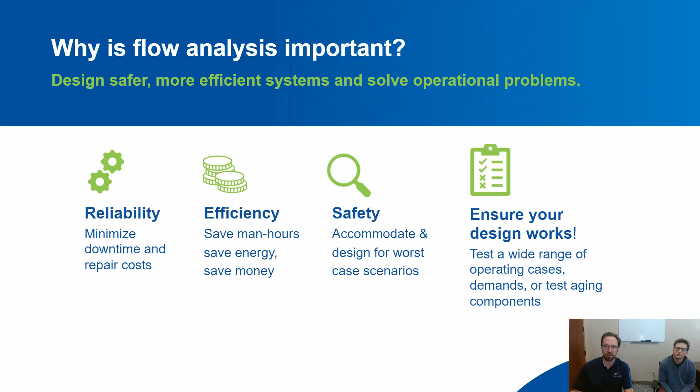And of course, just ensuring the design works. So not only making new greenfield designs, but also improving designs that you may already have. We serve a lot of different industries.

General software, but a lot of applications there. We have a global reach. This past year, I believe, was our 30th anniversary, so we've been around for some time. We have a presence in more than 100 countries around the world, in large part supported by our network of partners—32 distribution partners all around the world that know, understand, and sell our software.

We also like to work with students and universities, so we have a lot of presence there, with student outreach and things like that.

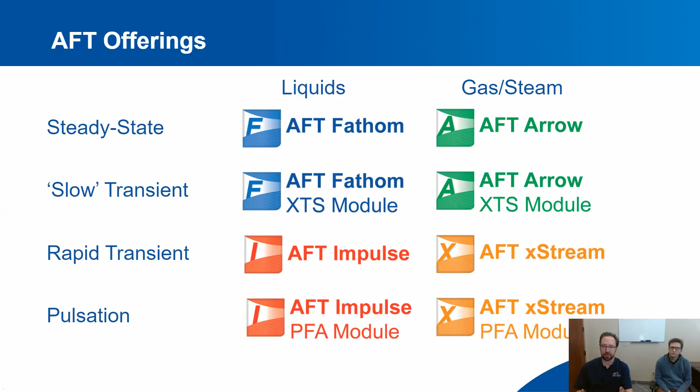Our products, we have this kind of matrix of products here: Fathom, Arrow, Impulse, and xStream. The matrix here is that we have 2 products for liquids, 2 for gases.

And on the opposite axis, 2 for steady state, 2 for transients, essentially rapid transients. So Fathom is our liquid steady state software, Arrow is similar steady state network software for gases, and then in the transient domain we have Impulse and xStream.

We also have pulsation capabilities in those rapid transient softwares. So we have this pulsation frequency analysis, or PFA module, in both products to enable specific analysis in the frequency domain.

On high speed pulsation like you would see from a reciprocating device. We also have these, what we call here, slow transient modules.

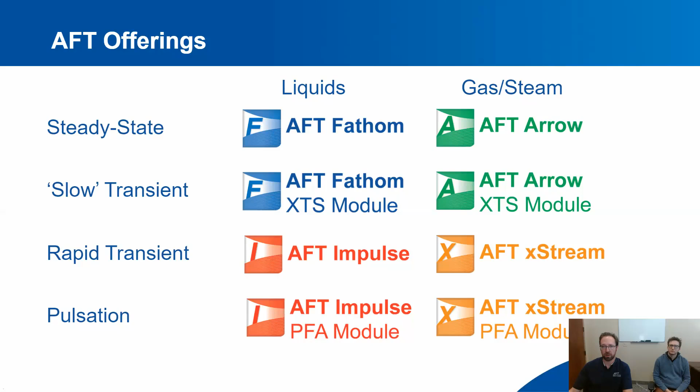That is kind of a quasi steady state, over-the-day kind of change in maybe tank levels, something like that. What we're going to be talking about today is really the fast transients here that we analyze with AFT Impulse and AFT xStream.

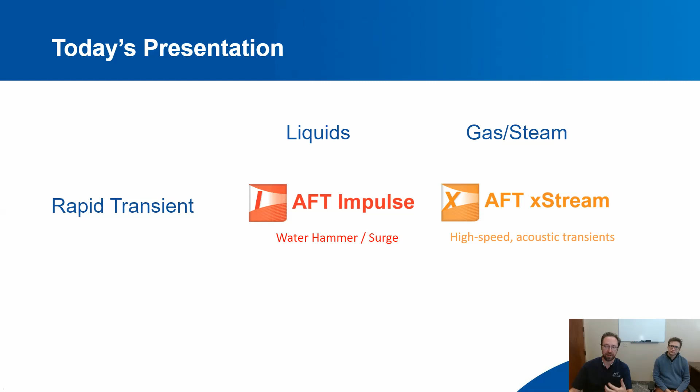So high speed acoustic transients, surge, water hammer, steam hammer, things like that. And in particular, our papers were really focused on AFT Impulse—water hammer and surge.

All right, so the topic at hand is a summary of these papers that we wrote and presented for the ASME PVP conference this past July in Seattle.

And I do want to call out that Mark and I are not the only authors here. We also worked on these with Jan Schroeder from the Netherlands and Mokveld Valves. They make specialized valves, check valves, and surge relief valves for handling surge better.

And also Dylan Whitty with Brown and Caldwell. He has done tons of modeling with our software. He's really an expert in building these kinds of systems and understanding the risks and strategies involved in sizing this kind of equipment.

And then also on the relief valve paper, another colleague of ours, Devin Roraba, helped us out, and he actually presented that paper in Seattle.

So those papers are on our website—you want to go take a look and read the whole thing. It'll also be available, I believe, at the end of the webinar here for you.

So motivation here, as Jeffrey kind of touched on, check valves and relief valves are common. You find these in a lot of different places. There's an issue in that they are often designed and specified strictly from a steady state perspective - how do I have low pressure loss, things like that.

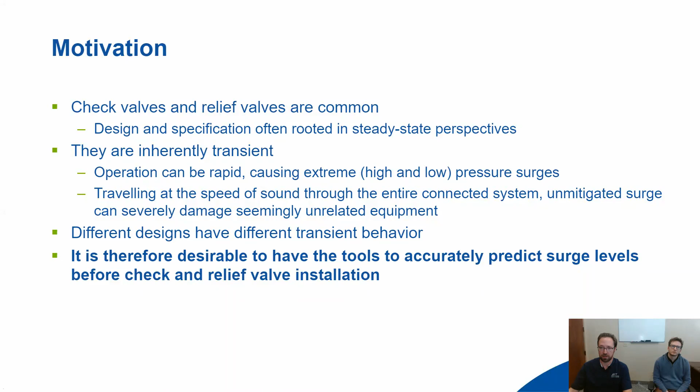You can estimate the magnitude of that surge with the Joukowsky equation. Very simple equation, it's just an estimation. A key thing is that it is not always conservative, and it's also very easy to misapply. In a situation like a valve closure like this, it's pretty easy to conceptualize what's going on, but in a system, things get very complicated very quickly.

So proper analysis requires a system level simulation. What we would recommend is the method of characteristics, a very common method used industry-wide in this kind of analysis, and the method that we use in AFT Impulse. So we're using this Joukowsky equation as an easy to understand first order estimate of what's going on here, but we wouldn't recommend its use for application.

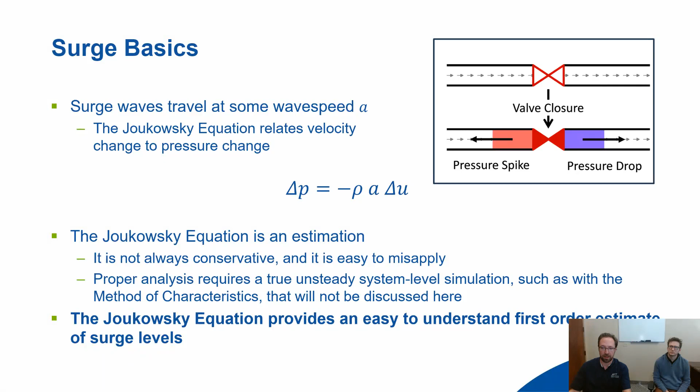Communication time is this concept that pressure waves take non-zero time to travel throughout the system. Anytime a wave is generated by a valve movement, for example, that wave is propagated throughout the system, and it will eventually run into something - a dead end, a tank, something that will cause it to reflect. And when it reflects, it will eventually travel back to the device that initiated the surge. So if that communication time is long enough, the surge levels at the initiating device, like the valve, don't have time to be relieved by the boundary, essentially.

Any closures faster than communication time will actually see the same effective surge level as this idealized or Joukowsky surge. That essentially means that if your system is long enough, if the communication time is high enough, you can't necessarily just slow down the valve closure to mitigate the surge. It might have to be slowed down to an unreasonable degree.

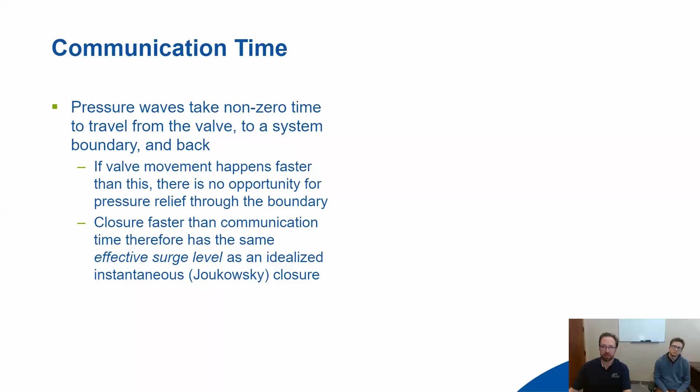As I mentioned, AFT Impulse is our software for modeling one-dimensional acoustic transients in liquid full piping networks. It uses the method of characteristics, and captures the effects of surge and communication time. We do all of this in a very fundamental way, from root equations, conservation laws, things like that. So our recommendation is, of course, to use AFT Impulse, but an even stronger recommendation is to be sure you're simulating things and not guessing or estimating. It's very easy to miss things.

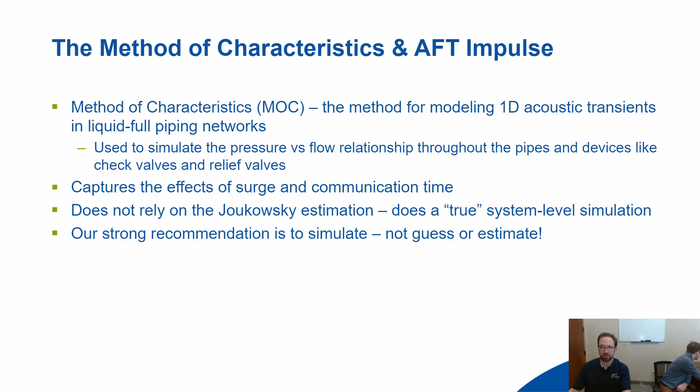So an example here, just to maybe drive the message home, is what kind of magnitudes of surge are possible. Consider something like a pump trip, flowing initially in steady state flow through a valve. When you trip that pump, this flow is going to decrease - just water, nothing fancy here. The valve closes or maybe opens against a reverse velocity of 1 meter per second.

Maybe during the pump trip, this is a check valve for example, and you have 1 meter per second flow through this valve as it closes. The slam of that valve is going to generate surge that travels throughout the system, including maybe, let's say, a half-meter expansion loop some distance away, hundreds of meters away, not really related to the pumping skid or anything like that. The question is, what kind of force might you see on that expansion loop?

From the Joukowsky method estimation, you can say that the pressure surge here is going to be about 1.2 megapascals - that's pressure level above or below the steady state pressure. A very simple way to estimate force is just taking that pressure surge and multiplying it by the cross-sectional area of that expansion loop. In this example, that would give you about 235 kilonewtons, or 53,000 pounds of force.

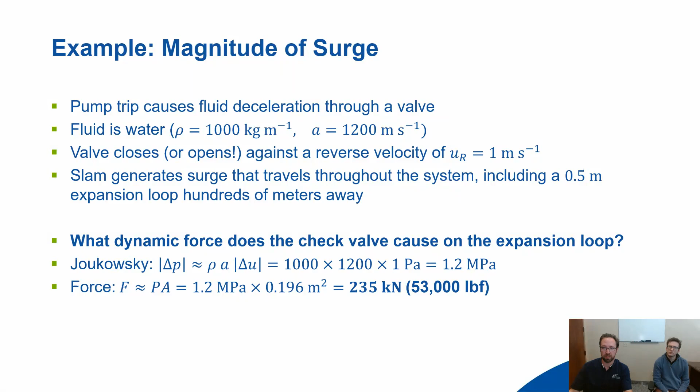Okay, so that's all just a primer on surge, and why should you care about surge. Now what we're going to focus on is these devices themselves.

So check valve obviously is just a device to prevent reverse flow. An ideal check valve is going to allow forward flow with zero pressure loss for any positive pressure differentials and zero reverse flow for any negative pressure differentials. It will also react instantly to changes in those conditions.

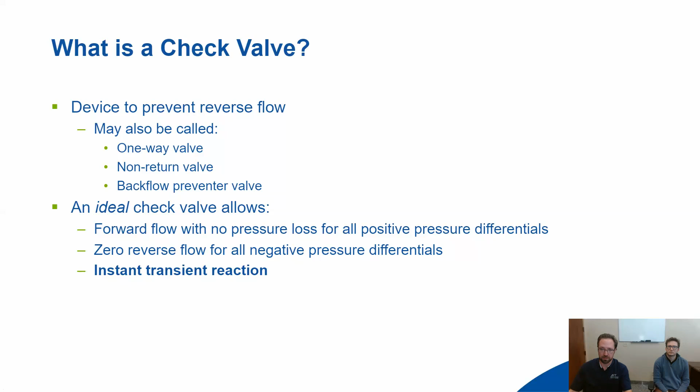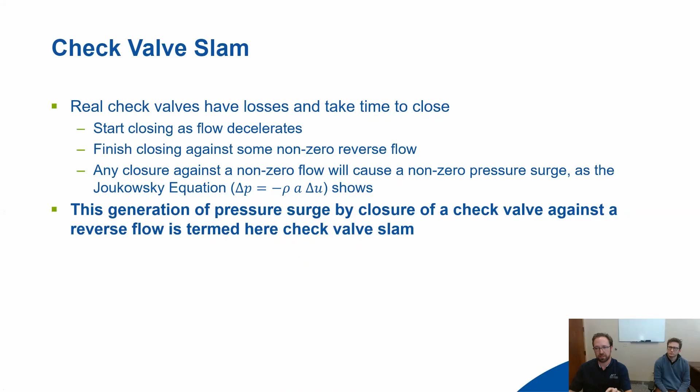Check valve slam, this is something that we're kind of defining here for the purposes of our discussion. Any real check valve takes time to close. And the fact that flow is reversing as it closes means it's going to close against some non-zero reverse flow. And that's going to generate surge, as that example showed. The generation of this surge, because of the closure of the check valve against that non-zero reverse flow, is what we're calling slam here. So there's also maybe mechanical concerns of closing a valve too quickly, but that's not specifically what we're talking about. We're talking about the pressure surge.

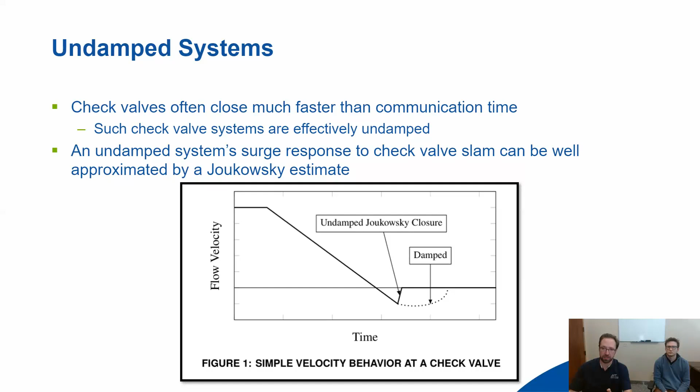If a system has a check valve that closes faster than the communication time, we can call that an undamped check valve system. And most check valve systems probably fall in this domain because check valves do close very quickly, generally. In undamped systems, surge response is going to be pretty well approximated by the Joukowsky estimate. So you can see here in the figure, if you had flow decreasing linearly until it became negative, at some point that valve is going to begin closing, but you can basically approximate this as an instantaneous closure once it hits a certain reverse velocity for an undamped system.

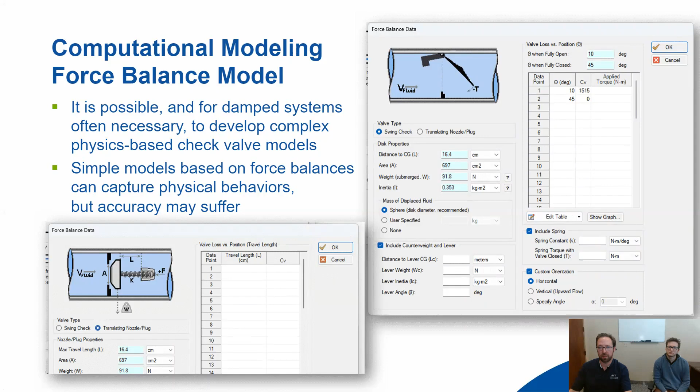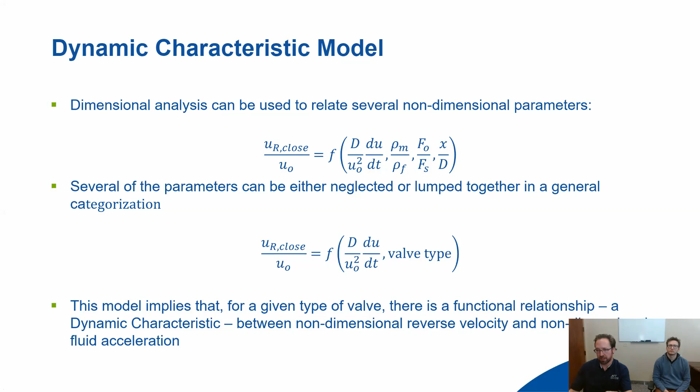There's dimensional data and non-dimensional data, like a lot of these kinds of models. You see in the literature a lot of non-dimensional kind of data and work that can be easier to handle computationally, maybe easier to write some papers on, but it can actually hide real physical behavior. So two dimensionless characteristics can actually vary substantially between two valves of apparently the same type. Two valves with identical non-dimensional characteristics may behave dramatically different, or have dramatically different peak absolute surge pressures. So that's a quick argument that we're making here.

It's expanded a lot in the paper on why you should really use dimensional data, even though you see maybe in the literature a lot of non-dimensional data. It's safer to use dimensional data.

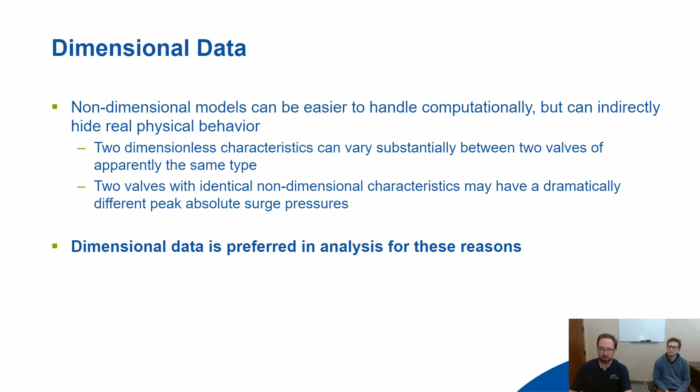It's also important to keep in mind that this dynamic characteristic model is empirical. So that curve, the relationship between those two values, is generated by test data. So take care if you're using just a curve with no data points.

This figure here is an example from the paper of one of the kind of situations you might find just in the literature. This is very typical that you just see the line here, but the real data has obviously a pretty significant scatter. So the check valve behavior is pretty chaotic, and this model should be thought of as a median behavior, not a guarantee.

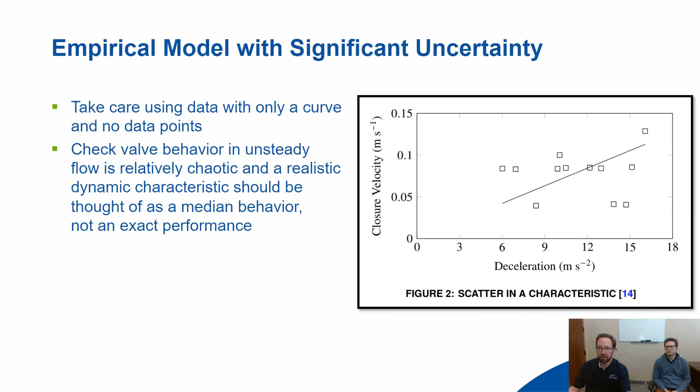There's also a lot of variability within a particular check valve type. So sometimes you'll see charts kind of like this one that are charting closure velocity versus deceleration. And it says this is the line for maybe a nozzle ring valve. And there's one line on the chart. And the reason you may see that is because that chart may be non-dimensional. But that non-dimensionality kind of hides the fact that there's actually quite a lot of spread in the data here.

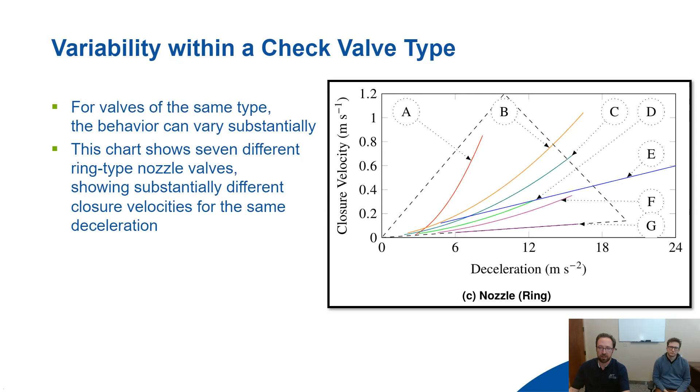So this chart is just showing that even though you have the same type of valve, depending on the actual manufacturer of that valve, the size of the valve, the specifics at play, behavior may vary quite a lot. There's a lot of historical data here. So this is that data I mentioned that has been generated via testing to create these dynamic characteristics. It's not necessarily common, but there's enough of it that we felt it was useful to create this paper and compile as much as we could of these different characteristics.

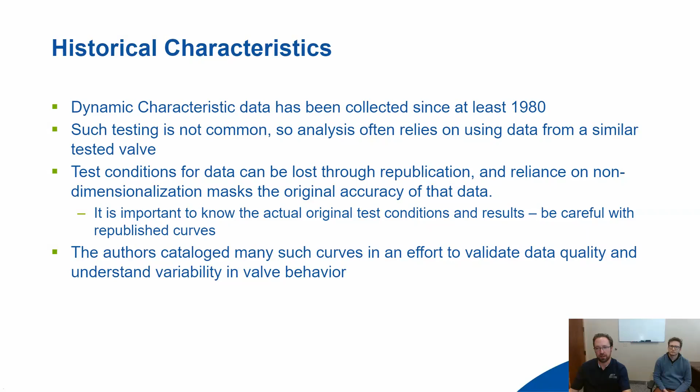But some data can be lost. So when it gets republished, you might lose those actual data points. You might have only the curve. You might lose the actual test conditions and only have non-dimensional data, things like that. So we cataloged all of this to try to quantify what is the data quality and what does the variability of the data look like. So this is a very quick summary of all of that research that we did.

So it's showing you that different types may be better, but it's also showing you that there's a lot of overlap here and a lot of range. So you have to be careful not just saying, hey, this is the characteristic for a ball check.

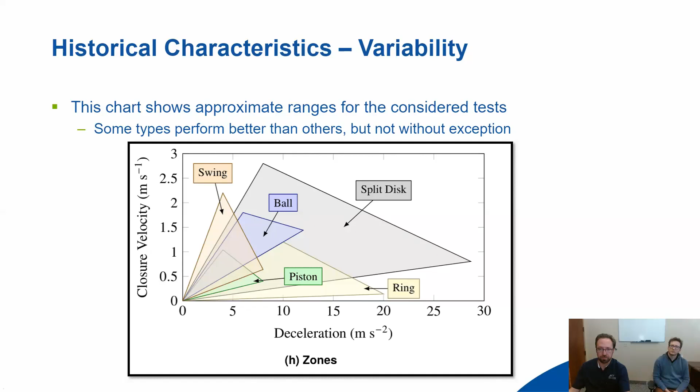Pretty quickly here, I'm going to go through how do you calculate this deceleration. Because we have this simple chart here with this nice line saying maybe I have velocity decreasing over time due to a pump trip. And that's going to correspond, since this is just a linear slope, to a constant deceleration. And it's pretty intuitive that I can just use that to look up a deceleration on the dynamic characteristic and get an associated closure velocity. And then from that, determine essentially a pressure surge level.

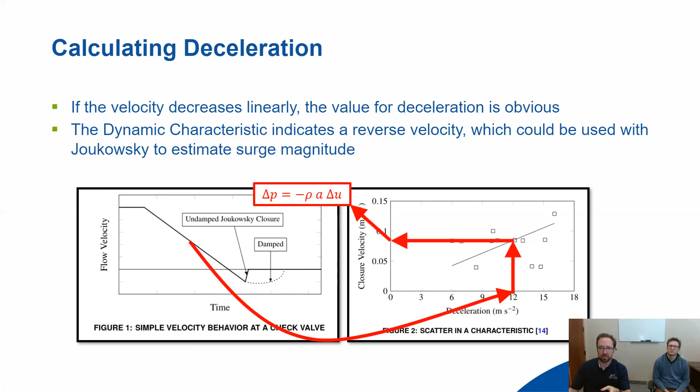So that's pretty straightforward, but realistically, you have a complicated deceleration profile. So it's less clear what value to use. And again, I'm going to go through this pretty quickly just to emphasize that there's a lot of options here. One option is to just start measuring at the beginning of the simulation and stop when flow reverses and use that slope to estimate the deceleration. But that might miss when the closure event actually begins.

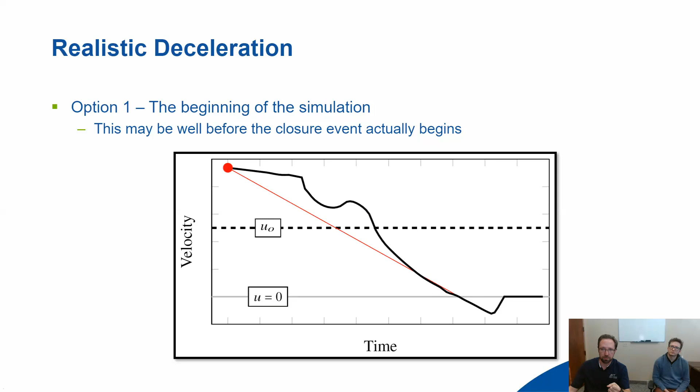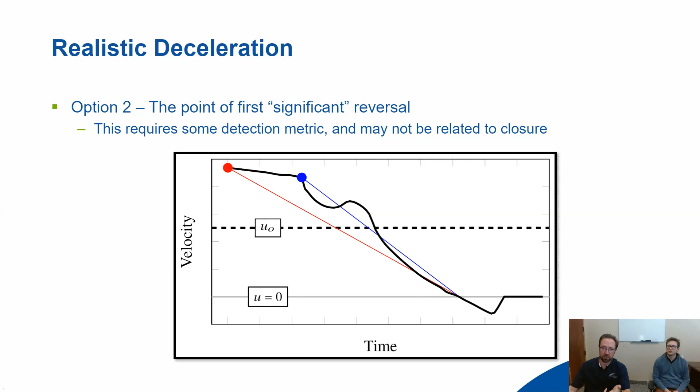So you can try to guess, well, when did the velocity start decreasing significantly? That requires some kind of metric. It may still not be related to closure. You can try using an instantaneous acceleration value, but with any kind of numerical simulation, that's risky because you can get some erroneous values just due to simulation noise.

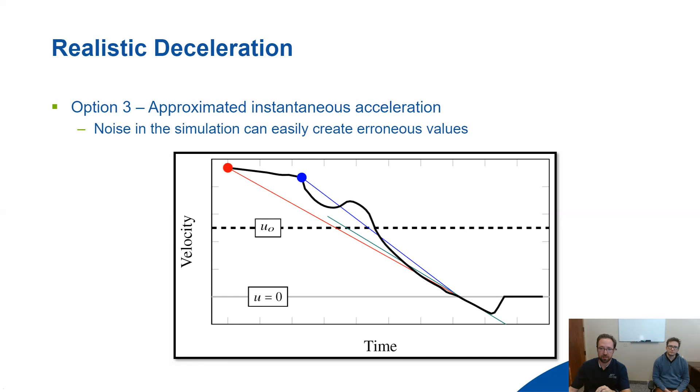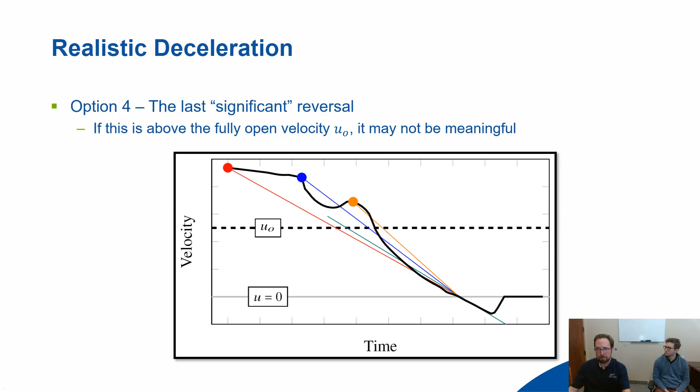You can try checking for the last significant reversal, but if that's above some fully open velocity, that's the velocity needed to keep the check valve completely open during steady flow. This may not be meaningful because any changes in velocity above that point aren't resulting in valve movement. You might just use a specified time before reversal, so a sliding window that's just checking things.

But now we also have this concept of natural closure time, which is essentially if you, in stagnant flow, just let a check valve close, how long does it take to close? There's a relationship between that and how much you can realistically expect it to be considered as being forced to close by the transients in the system as opposed to just naturally closing. So complicated relationship there, potentially.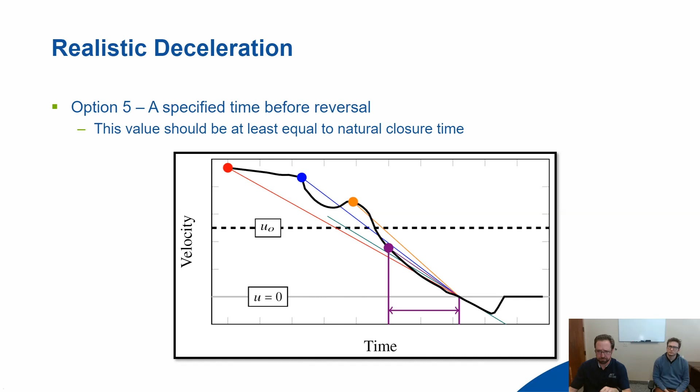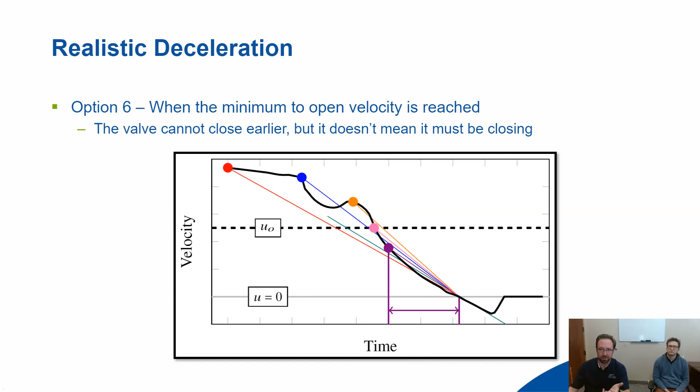You could also just say, well, let's just start tracking when this minimum velocity is reached. So it can't close before that, but maybe it is closing. But again, it's not necessarily closing. So a lot of options there. I went through that quickly. And our recommendation here is that you shouldn't use velocities above that minimum to fully open velocity.

The valve is fully open and can't be undergoing any kind of movement. And the deceleration you should use should be from when it drops below that minimum to fully open line. If the time to closure from the above point is longer than the natural closure time, you should use a specified time or check that specified time. And whichever deceleration is stronger than the above, use that instead. So it is confusing.

The summary, this is a lot easier to see in some diagrams and stuff. But the summary is basically there's a few options to calculate deceleration, and you want to use the most severe one that you can calculate with stability. So you don't want to do anything numerically suspect, but you want to say this is a conservative approach. I want to take the most severe deceleration that's reasonable to calculate and use that.

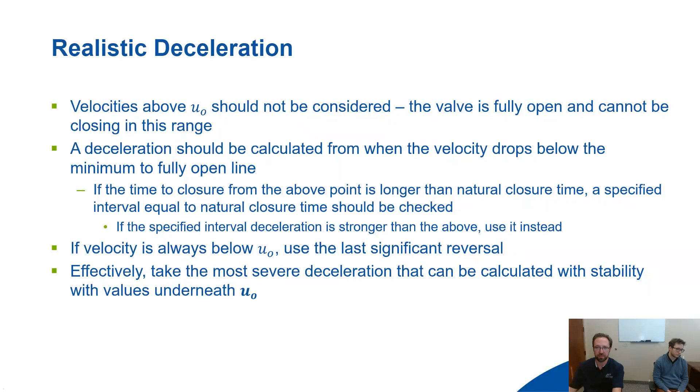All right, so the characteristic model in Impulse. This is just a screenshot from our check valve model. And you can see a number of lines in the lower right of this figure. Those are different options for dimensional check valve curves. So you can choose one of these. You can choose non-dimensional curves, all just from the literature, and run with those.

But you can also define your own characteristic. It's pretty simple to do all of this. It's really just, give us a curve, give us maybe a fully open or minimum to fully open velocity, and you can run with it. And Impulse will give you some estimation of the surge levels when that closes.

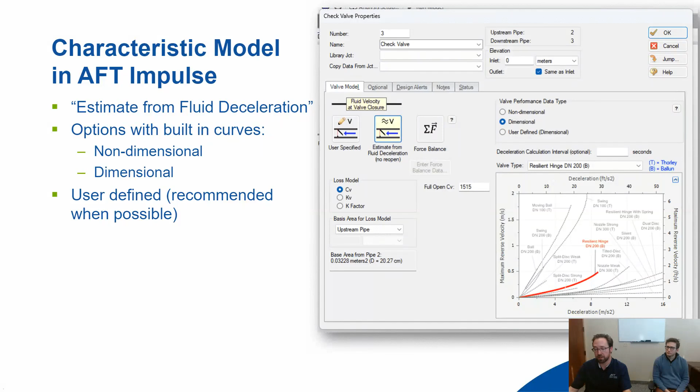So I said a lot about, hey, this is an empirical model. It's not great. You want to do things conservatively, so that brings up the question, well, how accurate is it? This is from another paper that some colleagues of ours generated, both at AFT and industry partners. Essentially a case study on a municipal water pumping station in Barcelona. And the idea here was there were two check valves in the field, and they were looking at which one of these will be better for the system. Do we need to replace the swing check with the nozzle check?

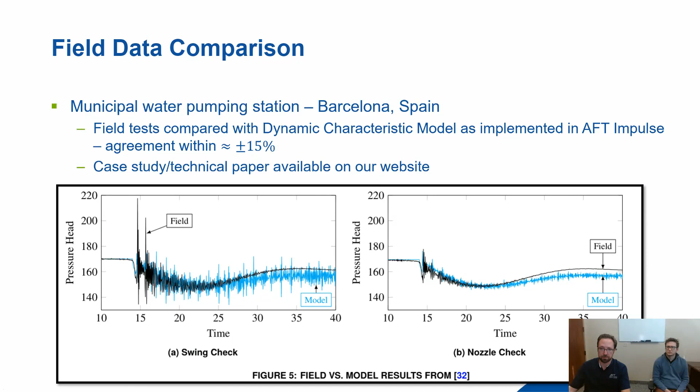So there's field data here, measured in black there, and data from Impulse in blue. And the agreement is pretty good here. I would also note that the scale on these two graphs is the same. So you can see a pretty dramatic reduction in the surge behavior here with the nozzle check valve as opposed to the swing check valve. So that would have a dynamic characteristic that's lower on that other graph. And I'm not the expert on selecting hardware. Our co-author that's not here, Jans, is.

So just briefly, I'm going to touch on valve selection. There's trade-offs between steady and dynamic performance, but it is incorrect to say that a check valve has to have good performance in one, that you either have to get a good steady state valve with low pressure loss or a check valve that works well in surge. An engineered valve can have excellent all-around performance.

For liquid service, I would say our general recommendation for valve selection is ensure the dynamic performance is acceptable. That's a pretty broad statement, but it's a quick check that you can do, especially if you're trying to do a conservative or a rough first order check. And also, keep in mind that not all check valves require a highly specialized engineered valve. You might do this quick check and see that the worst case surge here is more than acceptable.

That's fine. We're not trying to argue that every valve needs to be specialized or that every situation needs as much protection. But it may not be very clear which system has a critical check valve. It's not just this system is important, so it needs a critical check on the check valves, or this system can stand surge. You do really need to do this second step, which is look at the dynamic performance, run a quick study, see if it is going to cause some problems, and then make the second judgment on criticality.

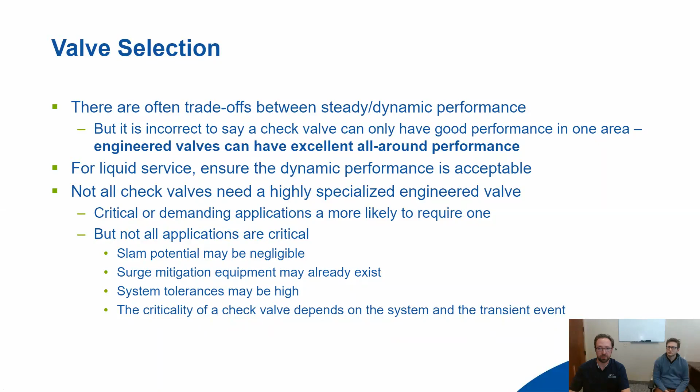All right, and with that, I will pass it over to Mark to talk about relief valves. Sure. Yeah. So we'll just kind of start from the basics.

This is what we're doing. Oh, cool. We should do that instead. Sorry, give us 1 second here.

Okay. So starting from the basics, talking about what are we considering a relief valve. So a relief valve is just any kind of device that is specifically made to open and mitigate an overpressure, any kind of high pressure. Conventionally, what you usually hear considered as a relief valve is overpressures that are based off of slow transients.

So slow transients would fall more in line with, you see them a lot with like pump deadhead kind of stuff. So pump deadhead, thermal expansion of liquids, you'll find them a lot in compressible flow for like tacked on a boiler kind of thing. You find them on water heaters and stuff like that a lot. Within liquids, you usually find them for like fire relief cases and things like that.

There's really two different types that we consider at AFT. You have reclosing devices, which is a relief valve that is able to crack open, relieve fluid and then drop the pressure and then reseat, and then it can be used again. Usually those have different names, relief valve and PRD, or pressure relief device, or PRV. In some industries, they refer to them as safety valves and safety relief valves.

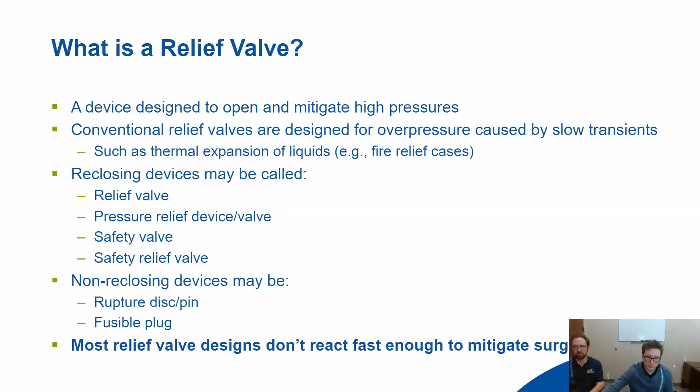Something that's really important to consider here is, we talked a little bit about slow transients and faster transients. Most relief valve designs, even though they are designed for overpressures, they will not react fast enough to mitigate surge. And in fact, there's a lot of guidelines and standards that are out there for relief valves and relief devices that just recommend that you shouldn't really consider the two of them within the same system. If you have a system that is prone to surge, then you should avoid it.

And that's true for API Standard 521. That's true for Emerson's handbook on relief valve design, a variety of other safety relief valve handbooks, including ASME and the international codes. But I think that it should be pretty clear that surge interaction with relief devices is unavoidable. And relief devices, because they are passive transient, they will react to surge in your system or any kind of overpressure. They can also cause surge as well.

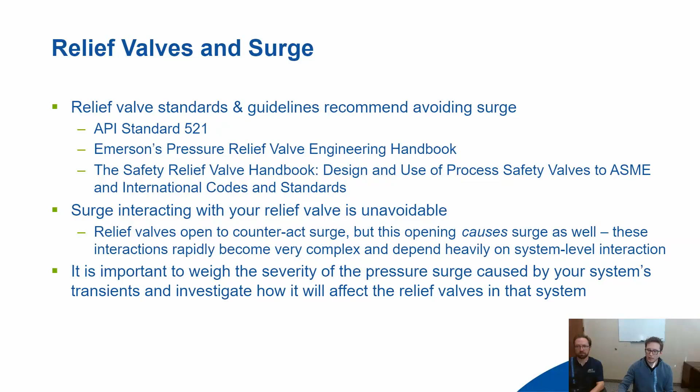Relief valves that open, they will try to open in order to counteract surge, but the opening can actually cause surge or instabilities, and those interactions with the rest of your system can quickly get out of hand. So it's important to remember that we want to weigh the severity of what is the relief valve doing versus what is the surge that your system is seeing, what are other causes of fast transients, things like that, which is why we advocate very heavily that you want to use a system level analysis for it, right?

So similar to what Scott said, using method of characteristics or something else in order to represent your system from a computational standpoint is incredibly important, and really when we're interested in doing it, whether it's for a check valve or for a relief valve, your main focus is on the system itself. We're more interested in ensuring that the valve is going to be represented accurately with respect to the system, and so with that in mind, we'll use the MOC for the actual system, and then we need a way to basically convert that back and forth with the relief valve.

So there's a handful of different ways really to do it from a one-dimensional standpoint, which is most of what surge analysis is focused on. You might just use a simple loss equation, so any kind of valve orifice, some kind of loss equation that relates a loss coefficient or valve coefficient to pressure loss and flow. You might use a lift performance curve or some kind of manufacturer provided data that will tell you how much pressure loss you're going to get based off of your flow.

And if you have a more in-depth investigation that needs to happen, then you'll start to see force balances that are being accounted for on relief valve plugs. And usually you just want some kind of a representation for inlet pressure to whatever your relief valve opening percentage is. In our experience, most of what you see are these top two.

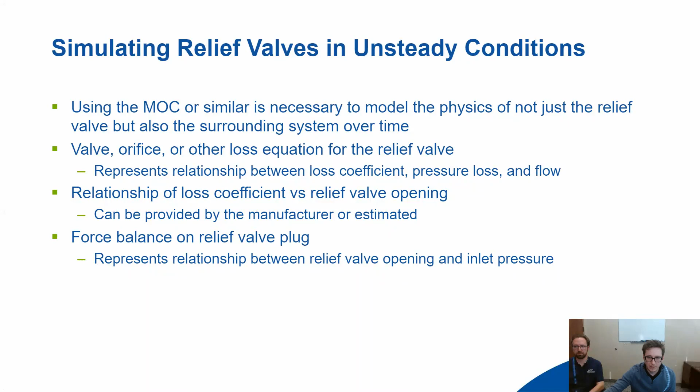Within the context of AFT Impulse, we have a very in-depth relief valve model that we advocate for, defined basically with two different concepts in mind: when does the valve open, and once the valve is open, what kind of pressure losses are you going to see based off of flow rates. We have opportunities to represent an internal valve or exit valve, whether you're considering the outlet side of the relief valve as part of your simulation, or you just jettison to the atmosphere or ambient, or do you want to ignore the relief valve standing pipe altogether.

Keep it in line. We have a variety of different profiles, opening and closing characteristics, and then also the set points, which is the bread and butter of really how relief valves function. We care about when your pressure set point is exceeded so that we can crack the valve. We care about the overpressure, so where it has maximum lift. And then we also care about the blowdown pressures - blowdown pressure is when the valve is essentially reseated. And obviously for a non-reclosing device, you would not have blowdown pressure. We also have options for rate limits and other loss models to characterize what kind of a valve this is, and what kind of pressure losses I would see.

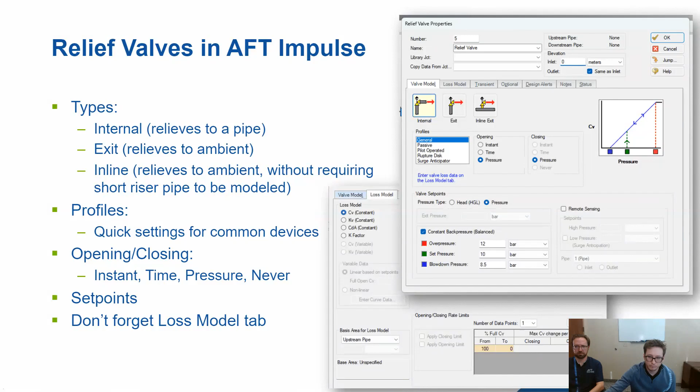So I'm going to just take a look at a couple of different examples here of how a relief valve might change depending on the system that you're seeing, the surge that you're seeing, and how that informs our process for what kind of design considerations you'd want to take. So the first one is a classic relief valve case, which is relief valve sizzle, simmer, or chatter, and we're going to simulate this.

So we have a simplified example here of a 2,000 foot long pipe that is at the discharge of a pump that's outputting about 100 psi. Nothing crazy, but it's going to an exit valve that is discharging to atmosphere. And our exit valve, we're just going to slam it within basically 100 milliseconds. And that slam is going to cause a surge wave to propagate back from the valve at the downstream side up towards the discharge side of our pump.

About 500 feet into the line, we're also going to put down this relief valve standing pipe that's just about 5 feet long. But we've sized the relief valve in case of a pump deadhead event - not trying to do anything with the surge. The relief valve is going to open over the course of a second with a set pressure that's just above where our ideal discharge pressure is. And in order to see what kind of pressure response would you have from this...

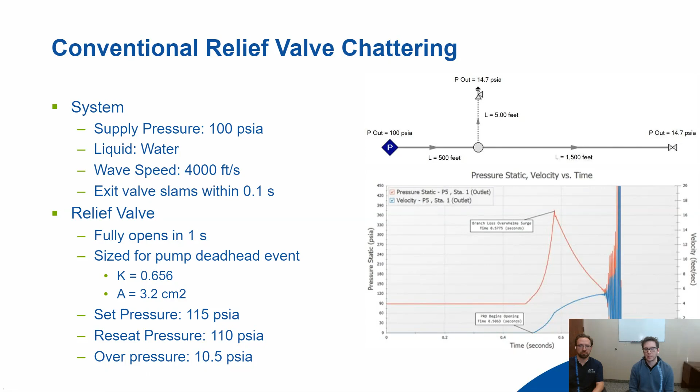What you end up seeing here is that the relief valve will actually open over the course of half a second. If you take a look at the graph here on the side, this is a transient response at the inlet of the relief valve. The red line is the static pressure, which you can see is remaining more or less constant until that surge wave hits it, and then it dramatically raises the inlet pressure.

Once it reaches above that set point, you see the blue line is the velocity that is passing out of that relief valve. The valve cracks open, and as it begins to relieve more and more fluid, eventually it overcomes that surge pressure that is in the actual relief valve itself. What ends up happening is the frictional losses from the standing pipe will overcome the surge pressure as it gets higher and higher, and you end up with a chattering situation as the pressure rises, which causes the relief valve to open, which causes the pressure to drop as it relieves fluid, which causes the pressure to rise once again, and you end up with an unstable situation here.

So this type of effect is what you would see from some type of relief valve chattering situation. Usually, relief valve chattering is a result of a mis-sized situation, right? We have a relief valve that's sized for something else that's trying to respond to a surge wave that's incoming, and that instability will cause more problems as it goes.

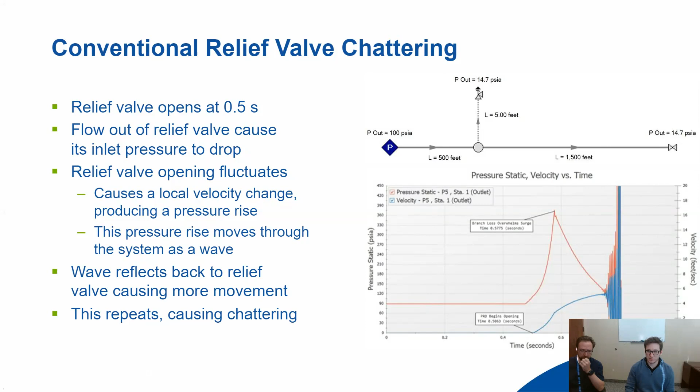So then it begs the question of, well, why can't we use a relief device in order to mitigate surge? And in order to take a look at that, what we're going to do is take a very similar situation here.

We have that same 2,000 foot long pipe, but we've raised the supply pressure so we can take a look at the system a little bit better. And we still have the exit valve that's slamming.

Within 100 milliseconds, but now the relief valve, we've designed it in order to respond to the pressure wave that's incoming. So you have a 50 millisecond opening, which, if you're familiar with relief valves, is dramatically fast for a relief valve. We have a set pressure and a reseat pressure that are equivalent, but essentially once it goes above that 300 psi threshold, the relief valve will open up to 330 psi above it.

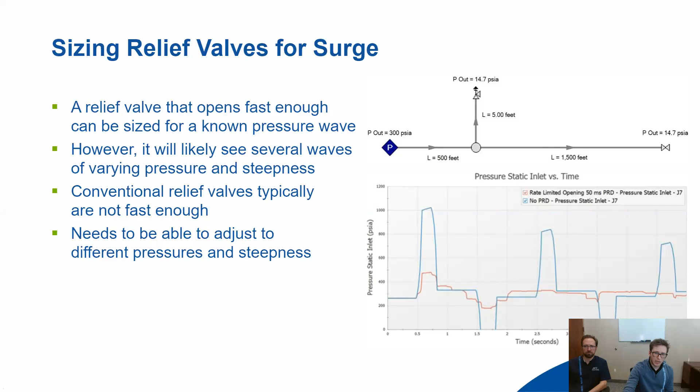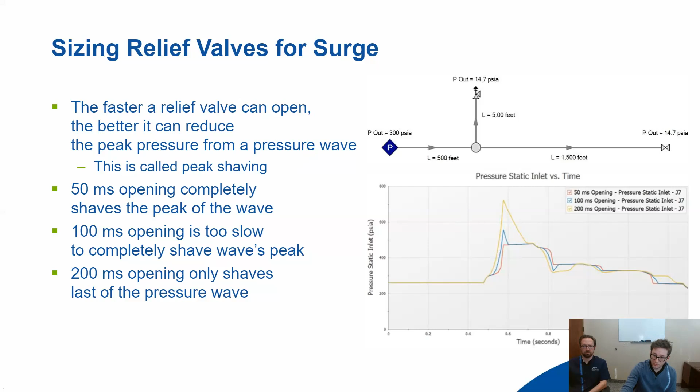And so that begs the question of, well, it looks like there is something here that, you could take a conventional PRD or something similar to that type of behavior, and you could mitigate surge with it. And so that's kind of where we get to the next component of this, which is more in line with what our collaborators with Mokveld valves, what they work on specifically.

And it leads to the surge relief valve. So the surge relief valve is something that is different from if you've ever heard of a surge anticipator valve. Surge relief valve is specifically for surge relief. It's not, that's the overpressure event that it's designed for. It's not for other scenarios. It's a unique relief valve that's better understood as a pressure sustaining valve.

And without getting into the nitty gritty of exactly how this works, because I'm not the expert on the surge relief valve, essentially as the pressure at the inlet of the surge relief valve exceeds your set point, then what you'll end up seeing is it will breach the set point, which will trigger a pilot. And when that pilot is triggered, it will vent out the atmosphere and allow a massive amount of flow that corresponds to whatever the surge wave you would see to flow through the relief valve. And specifically, it does so proportionally to the actual surge wave itself.

And the important part about this is that this pilot is fast acting enough to where it can actually handle the surge wave as it's passing that upsurge. And so it's unique in the sense that it is a pressure relief device, but it is not a conventional pressure relief device. And so this is something that is very specifically targeted for surge.

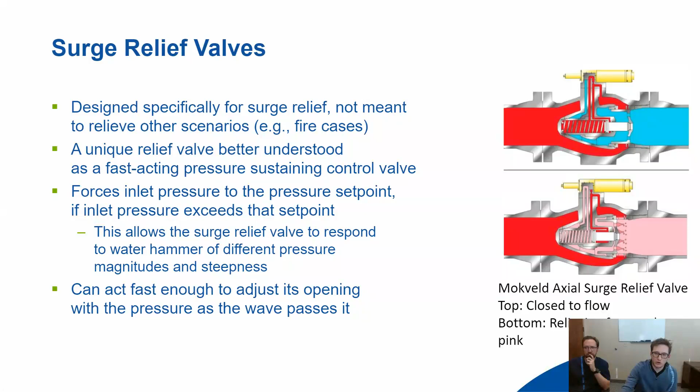In order to represent something like that, even within our own software, we have to treat it a little differently. Instead here, we have the same kind of system as before: 300 PSI going to an exit valve. But instead of having a relief valve device, we've had to replace it with something more representative of the surge relief valve, which for us is a control valve attempting to maintain pressure at the upstream side, closer to where the surge would be coming in.

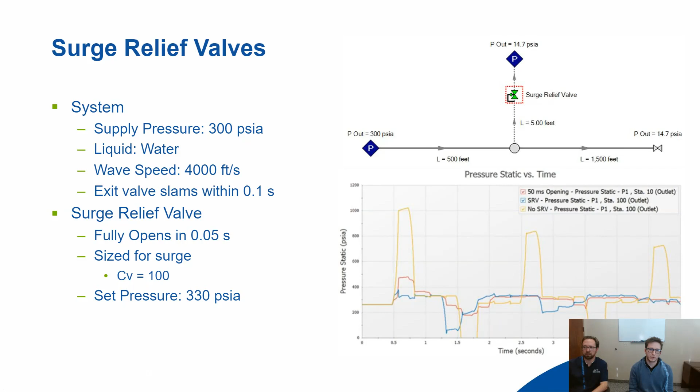For this representation, we still have it opening at 50 milliseconds, which is more on par for a surge relief valve. We've specifically sized it to mitigate the surge wave—that's what it's intended to do—with a set pressure of 330 psia.

Essentially, when we compare the surge relief valve case shown here to the cases we've seen in the past—no relief valve versus an idealized conventional relief valve opening a little too fast for most conventional PRDs—we see that the surge relief valve effectively attempts to shave that peak off completely. It reacts fast enough and accurately enough that the spike pressure on the upsurge, which is 1,000 psi for the case with no PRD, drops to about 500 psia for the red case. Then cutting down further to the surge relief valve, the blue line, it's not even breaching 400 psia.

So we see that the surge relief valve is able to handle this type of behavior on the upsurge. But for the downsurge, our simulations weren't accurate enough to represent it—you can see the blue line dips a little low, pretty close to the cavitation range for that downsurge as it comes flying back. So there's obviously a bit of finagling you have to do with this type of model. But this is a very specific and unique case of where you could take this type of relief device and use it for surge mitigation.

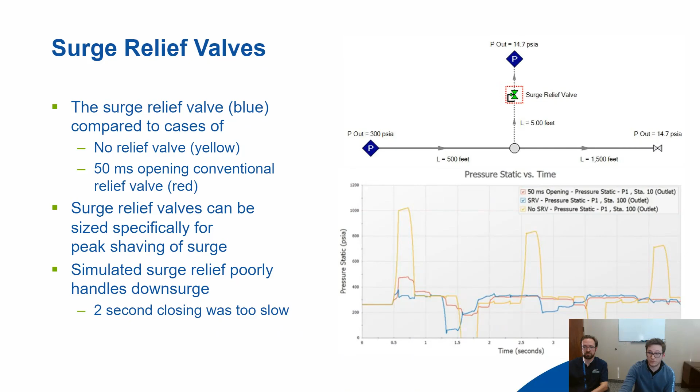So to conclude, as Scott talked about, check valve slam—a check valve closing rapidly against some kind of non-zero reverse flow—and relief valve activation, or any kind of initiation of transient, could be potentially dangerous for pressure surges, either in addition to an incoming pressure surge or as a cause of it. A lot of times these are overlooked because they're not primary events; they're not usually the things that initiate surge. They react and get exacerbated, but very often they're overlooked by most analysts.

What we notice is that for rule of thumb approaches, even the most seasoned analyst has trouble handling these types of surge system designs.

Something that's advocated in a variety of literature, but we need to advocate here just in case that was the takeaway: check valves and conventional relief devices are not surge mitigation tools. They should not be used as a primary surge mitigation device. You require specialized equipment to mitigate surge for relief devices, and for check valves, that has to be part of the design considerations in order to mitigate those separately. However, you still need to consider them for surge analysis, but they can't be your solution to the surge analysis.